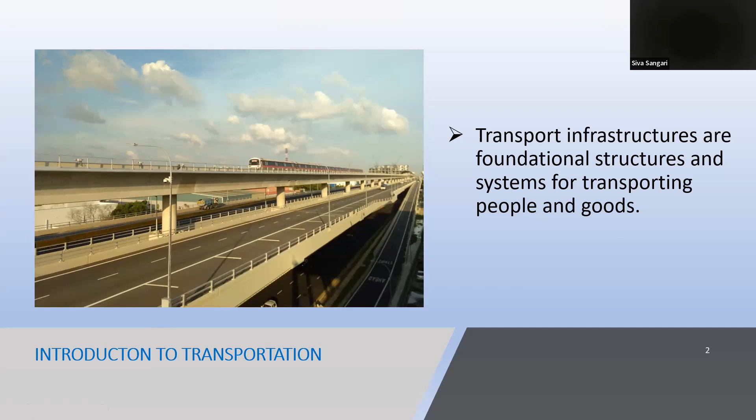Are we talking about infrastructure today? Is that so important? Yes, of course. Infrastructure matters most, especially at this time where cities are growing bigger and bigger.

By 2050, almost 70% of the world's population will live in cities. Such large-scale urbanization brings significant challenges, so established cities need to upgrade their existing infrastructure. An example is Chennai, a city that's existed for a few decades already but still needs to upgrade its aging infrastructure.

So it can keep moving today while anticipating the needs of tomorrow. For newer cities, they have to plan well and move fast, not only catching up with existing demand but also planning for future needs. Usually we cater for 100 years of needs, not just this year or a 10-year plan. It should be a future plan. Infrastructure is a matter in this world at this time.

No matter where we are located, even a large city or a rural town, infrastructure is fundamental to our day-to-day life. I think everyone will agree with that. Of course, yes.

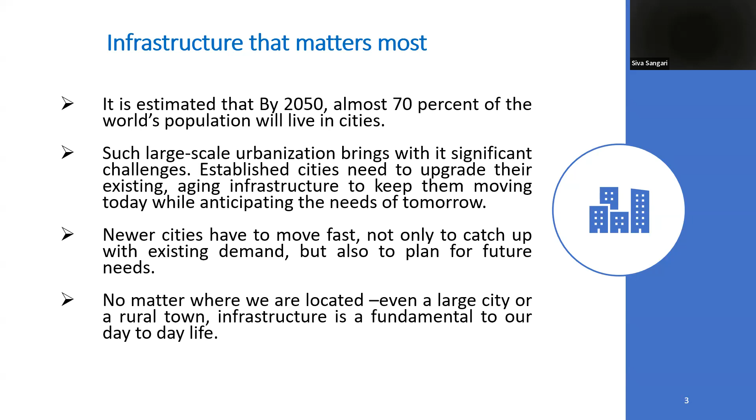So let's move into the different types of transportation. Just an introduction - don't mind, just stay with me. There's roads, railways, airports, and waterways.

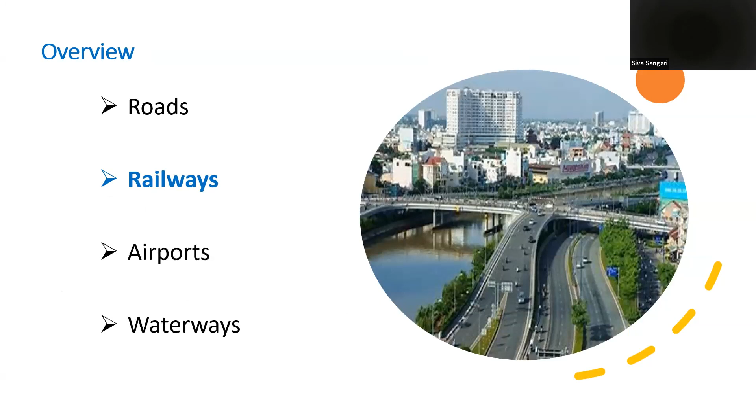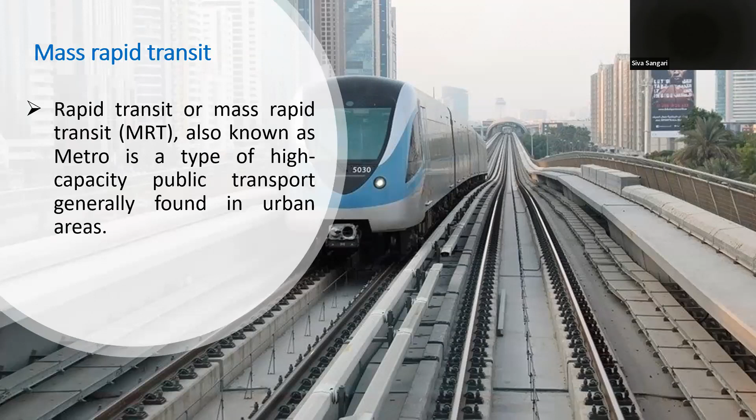Today we are going to go more in depth about the railways, specifically mass rapid transit. What is mass rapid transit? It's also known as metro. I think in Chennai or India it's very popular to call it metro, and it's a very high capacity public transport generally found in urban areas.

I'd like to introduce a bit more on the MRT network in Singapore. In Singapore, the MRT is quite old and very popular - they started constructing it long ago, so it's been prominent in Southeast Asia. I'd like to give an overview of the Singapore MRT.

You could see the colors on the right hand side representing different lines. We have actually so far 122 stations in operation and 203 kilometers as of now, but it's growing every year. We have plans, and every year we are opening new stations.

A few months ago my recent project finished, and we opened a big interchange station right in the urban area. That's become very popular now within just a few months. It's growing and growing every year, or I could say every month. They have plans for expansion.

The MRT has been continuously expanding ever since. The network is expected to double by 2040 as a result of ongoing expansion works. The Singapore MRT is the oldest, busiest, and most comprehensive rapid transit system in Southeast Asia, in terms of length and number of stations.

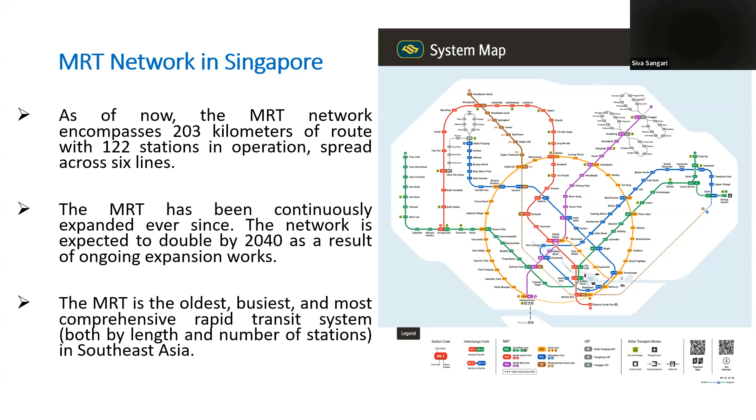Next is the metro network in Chennai. I think you're all aware of this, but just an introduction - I have also worked in Chennai Metro at the beginning, when they needed experts. I worked there about 1.5 years at the Anna Nagar, Shenoy Nagar stations.

What I could emphasize about the Chennai Metro is that it's the third largest metro system in India after Delhi Metro and Hyderabad Metro. The system commenced service in 2015 after the opening of the first phase of the project. The network consists of 2 color-based lines covering a length of 45.1 kilometers - maybe this is like phase 1.

They have already started with phase 2, and in the recent budget you could see plans for more metros in cities like Coimbatore, Trichy, and Madurai as well. Hopefully the metro will cover the major cities of Tamil Nadu. This is good for everyone, including NRIs - we could join the team of experts and serve our nation. I'm eagerly waiting for that too, in Trichy, Coimbatore, or Madurai, so I could join.

This is really fantastic news for civil engineers and students especially. By the time you complete your degree, say 3 or 4 years from now, the works may be starting. So there are more opportunities for civil engineers, and you could start your career with the right projects and the right works. That's really happy news.

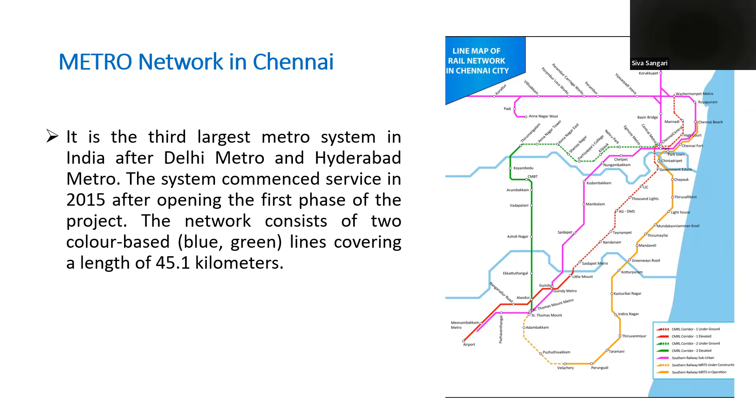Okay, let's go in. I think we have covered the overall networks in Singapore as well as Chennai. So let me go into today's main topic, the MRT design and construction.

What's really magic into the MRT design and construction? Yeah, it's nothing magic. There are many aspects. I would like to cover more on the 3 main items which are more related to civil engineering students.

So first of all, alignment. I think Dr. Vandana ma'am already covered a bit, but anyways, I have some slides and photos which will be attractive, taken from my projects. So maybe very useful.

Next one is environmental aspects. We should not ignore the environmental aspects in any construction, not only the MRT. Environmental aspects are more important for any growing construction here. And then the last but not the least, the engineering, which is our core subject. So these 3 are the main items I will be covering today.

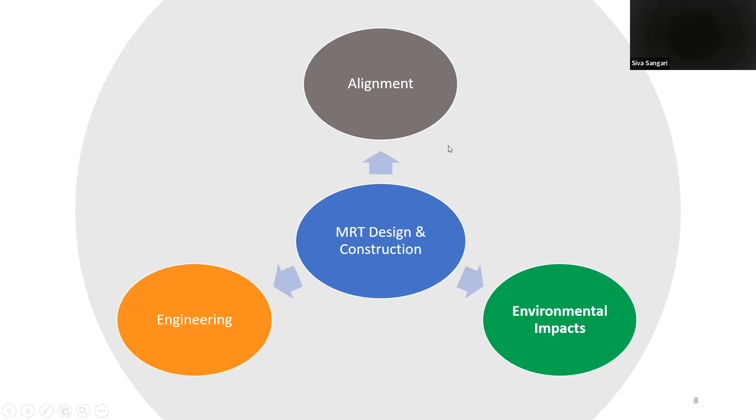So let's start with the alignment. Why is alignment so important? It's because railway line constructions are capital intensive projects. Once constructed, it is very difficult to change the alignment of a railway line because they are costly, really costly.

It's not only the government funding, right? It's getting funds from other governments or other companies. So it's not so easy to change your alignment. You want to go from Anna Nagar to the airport now, and later you want to change that route by increasing 5 kilometers - no way, it's not possible at all, because it's a major and quite capital intensive project, and it needs to be financially well structured at the planning stage itself.

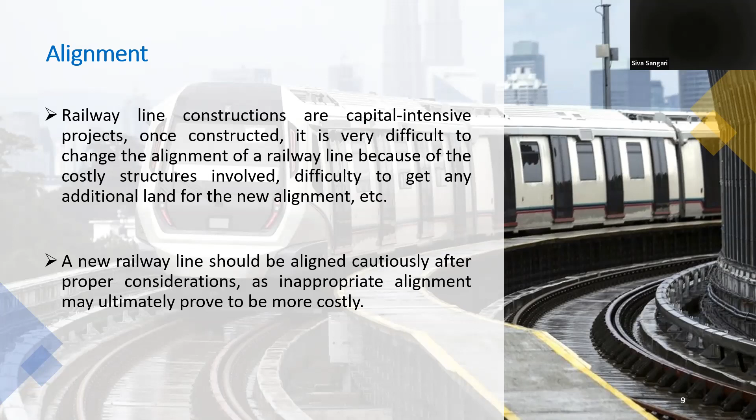So it's all collated with the alignment. A new railway line should be aligned cautiously after proper considerations, and any inappropriate alignment may ultimately prove to be more costly. You can't change it - even say 10 mm of height change in the alignment will cost millions of dollars. That's because we need to decide the alignment very cautiously in terms of horizontal, vertical, everything.

So what are the basic requirements of the alignment? The purpose of the new railway line is most important. It can be for industrial needs or public needs - it can be anything. So the alignment of a new railway line should serve the basic purpose for which it is being constructed.

Next one is combined development. The new railway line should fit with the general planning and form a part of integrated development of the city or the country. We can't say that you have to travel from your home for 1 hour to reach the MRT station - no way people will take that. So it should be a combined development within reachable area of the public or industrial users, whoever they are.

And then we should choose the shortest route. We have many routes, but we should choose the shortest because the aim of an alignment is to reach from one place to another place. So we should choose the shortest. I have a few more.

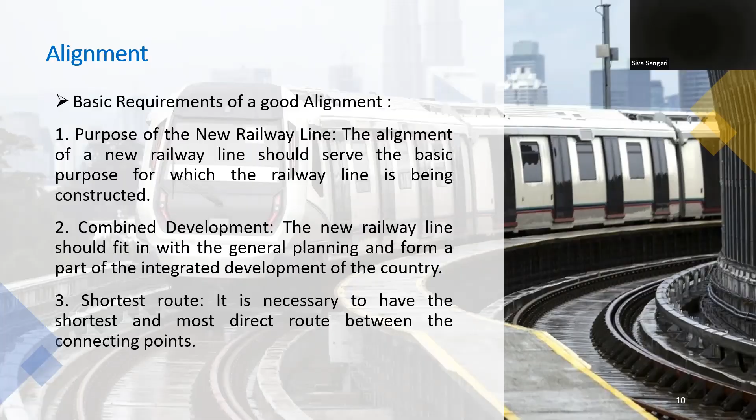So that's the topics covered already in the alignment. I think you have more or less got an idea of how we choose the alignment. There are alignment specialists, and we civil engineers are always a part of alignment specialists, and we usually give our feedback, our ideas, everything. So let's move on to the environmental impacts.

The environmental impacts refer to the possible effects of the proposed construction on the natural environment. These effects can be negative or positive. Sometimes it can be positive as well - you are creating a new feature, new shops, or a new development. The city or place can become a well-developed financial or industrial place - that's a positive.

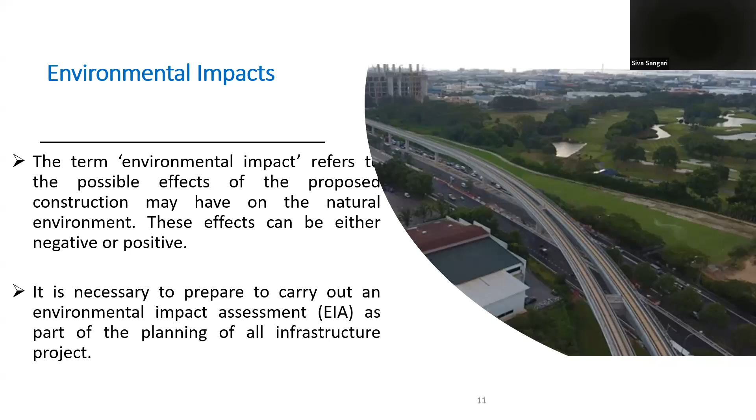And the negative can be like, in case you have no choice, you are using farming lands and all - of course it's negative, but we should have a balance. So the environmental aspects and impacts need to be covered very well during the planning of any MRT line. It's necessary to carry out an environmental impact assessment, which we usually call EIA, as part of the planning of all infrastructure projects.

So what is the purpose of the EIA? It's to ensure that the environmental effects of a proposed development are properly considered. This EIA could provide the local planning authority with better information about certain types of project, enabling them to make a more informed decision, so that the authorities could have an idea whether the permission should be granted or not.

These environmental aspects should consider not only the recent or near future issues, but cover overall future impact, say over 100 years, onto the area where the MRT is planned. This gives the government and authorities an idea whether to go or no-go for the project. Also, this is usually published to public forums so people understand what will be constructed in their area and can plan ahead. So environmental impacts are, of course, very important.

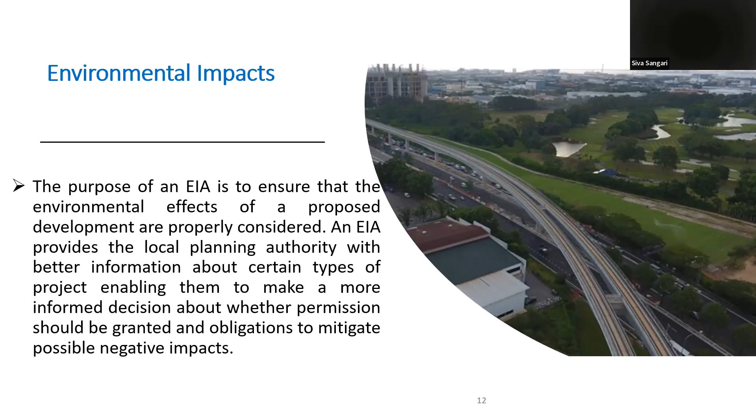Let's have an overall idea of architecture. While deciding other factors, aesthetic aspects should also be given due weightage, because it's very important. The design of a public transport system is becoming a symbol of the city. Maybe 30 years before, we could say LIC is a Chennai city symbol. Now there are a lot of taller buildings than LIC, but we could still symbolize it as LIC.

So accordingly, it's very important for the overall feature to be a symbol of the city. The design of stations is also important for local people. We could get specialists from the US who could give a fantastic design for Chennai or even in Singapore, but that may not really be attractive to local people, or they may not even recognize it—for example, showing cartoon characters or sculptures the local people don't know, that's no use at all. So it's very important that station design attracts local people, defines the places, and acts as a gateway to communities. That's where architecture plays its role, and that's why architecture is very important.

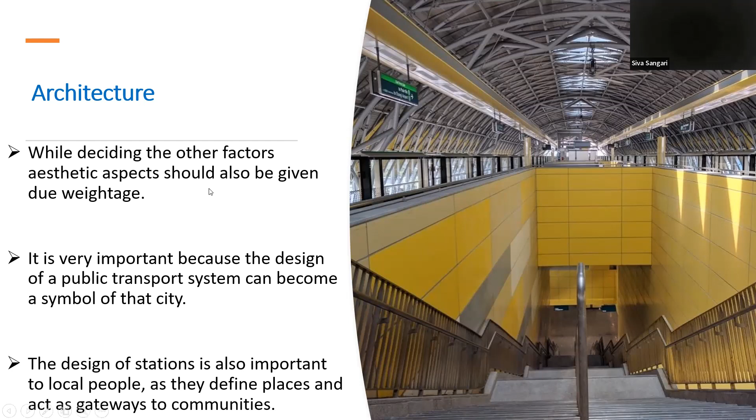Okay, let's move on to civil and structural engineering. There are many aspects to cover.

I believe there are no issues, I'll continue. Thank you, yes ma'am, there are no issues ma'am. Thank you, thank you—if anything, you can interrupt me, you can stop me, okay, or ask a question, you can stop me anytime. I have no issues, yeah.

Thank you. So there are many aspects in the civil and structural engineering field, but I'd like to combine a few main things. First of all, structural integrity and stability. Structural integrity plays a fundamental part in ensuring the structures are fit for purpose. This is the first line in any specific codes or specifications—the structures are fit to purpose. For the MRT, this means it should be fit for the MRT station.

It should also secure a safe design during construction, not only after construction. Design should cover safety aspects during construction and assessment of the structure. Assessment is most important—you think once everything is constructed safely, that's final, finished, bye-bye, station opens. But after, say, 10 years, there's a small leak on one side—how could you assess that? That's very difficult. So at the planning stage itself, we should consider the assessment, maintenance, and inspections of the structures. That's very important, which is why I put it as the first bullet point: structural integrity and stability.

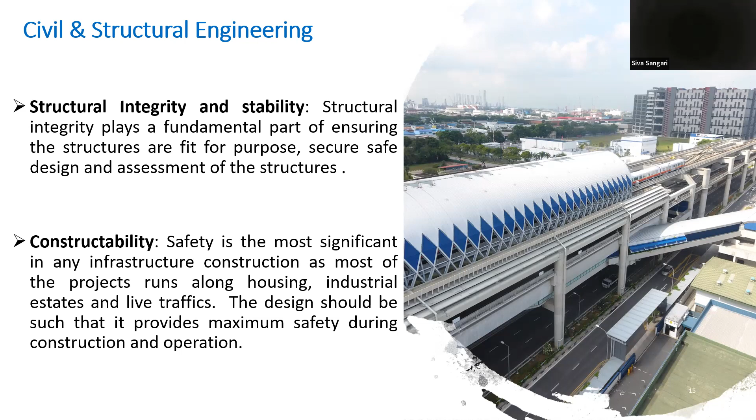So the design should be such that it provides maximum safety during construction and operations. Everywhere we should consider safety in any design - beam, column, everything. Safety is the first thing. You can't design a massive structure and just propose a 2-meter beam without considering how you are carrying it, how you will be installing that on site. That's the first thing before designing the beam or column or anything. I use beam as an example, but it's applicable for all members of the infrastructure or any project.

Third one, durability. Why is durability important? It's not a household or small tenant area that you will be dismantling after 10 years - infrastructure projects really last 100 or 120 years. We follow the Euro codes, and we also follow the LTA codes - the Land Transport Authority is Singapore's main authority that controls all this. They have a specific period for all MRT projects to sustain for 120 years. So the design itself should cover the design life to achieve the design life requirements - that's most important.

And last but not least, the economy. Because I could design a fantastic station, I could design 50 kilometers - but who will finance me? So economy is the main thing that should cover everything, and it should be attractive. The economy should be considered in our design so that everyone could approve it - not only construction and design cost, but also maintenance cost. I could build a big station, but if every year I have to paint it, every year I have to repair it, that's no use at all - it's really a wastage. So the design itself should cover economy along with maintenance, construction, everything.

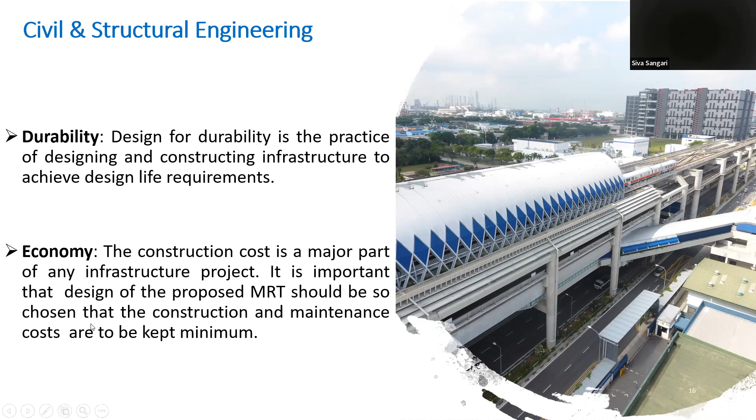I think I have covered all the bullet points. So hope you have got an idea of how we manage an infrastructure project, just in the planning stage.

Okay, maybe I would like to bring you all to the project now, so it will be interesting for you - our own project, so that I could give more insight and you have an interest. It will be interesting, I'm sure it will be interesting. I'm not sure if you all just had your lunch, I'm not sure whether it's sleepy or not, but I'm sure the photos coming up will be interesting and will keep you awake.

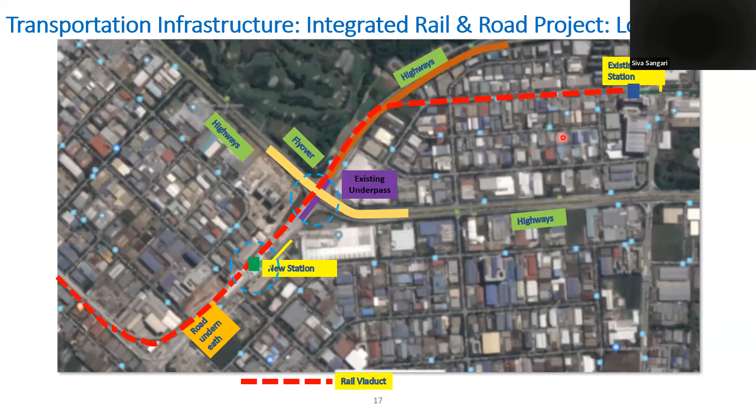So for this project, I would like to give an overview. It's the first integrated rail and road viaduct project in Southeast Asia. I think now there are many other projects under construction, but this is, I could proudly say, our first one - really a rail and road viaduct project in Southeast Asia, and the tallest as well. This project has 4 stations and an associated 4.8 kilometer road viaduct, 7.5 kilometers of rail viaducts. This is mainly to improve public transport connection to a neighborhood industrial area - as I said, it's connecting to a port. We even have interchange stations, which I'm covering in the next slides.

What are the key challenges? We have discussed the plannings, alignments, construction, safety, maintenance, etc. That's the planning stage. Are those bullet points still existing in the real project? Yes, there are many challenges we have faced.

The first thing is construction over live traffic. We could not close the road for a long period over the years. We could only close one lane for a few hours, and that also requires a lot of approvals. So mostly the constructions are ongoing over the live traffic.

This is also a long span rail viaduct. I'll cover in upcoming slides how long span rail viaducts are constructed, with spans over 70 meters. These rail viaducts also cross existing flyovers, and the height of the existing flyover is already 5 meter plus, which is the minimum for Singapore, so we should construct above the flyover. Then we have interchange stations, which are actually 33 meter height with 4 levels, over live traffic.

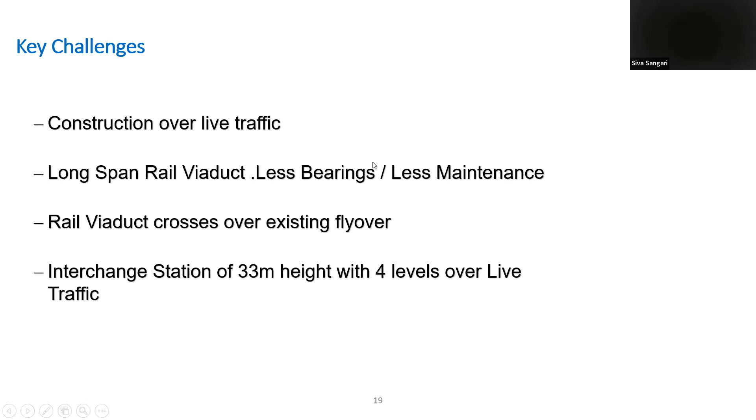What are the types of safety and implementation we have covered? There are 3 major safety implementations: the first is design safety.

So design safety - while designing, how can we ensure safety? That's maybe a question for the students as well as many of us. How can you ensure safety during design? We are just following the codes, right?

It's not only about following the codes, but testing and specifications, construction methods. Every code gives you the idea of designing, but the construction method should be discussed with the construction team before finalizing a member or scheme of an MRT. So construction methods should be considered in the design safety and risk assessment.

We always have a risk assessment, which is like a flow chart, and everyone should give feedback - for example, an engineer, alignment, architect, etc. All will have feedback on the risk assessment.

Then construction safety - this one we are more or less aware of because we can visibly see how constructions are complex in nature. So site appreciation, work methodologies, and product quality assurance - we should maintain product quality assurance throughout construction.

Finally, but not least, public safety. I've heard a lot of news about lack of public safety even taking lives, which is more valuable, right? So public safety is more important. We could have a temporary safety system or a permanent safety system, and public risk management and communication, which is most important.

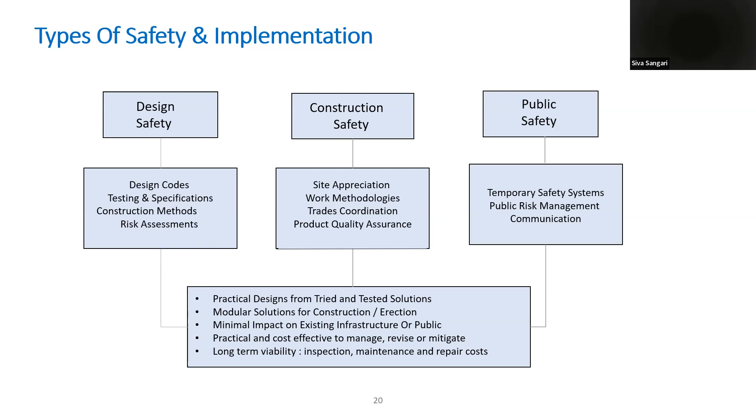So finally, what we are coming up with are practical designs, modular solutions, and minimal impact on existing infrastructure or the public. I can do a very powerful alignment, but if I'm going to demolish a kilometer of houses, that's really not possible. So it should be minimal impact to existing infrastructure. All these aspects we have covered in our project.

So let me show you the station - this is like a footprint of the station, shown in green color. The main station roof is 200 over meters, about 300 meters in total. This station particularly has 2 entrances, but a few of the stations have even 4 entrances.

So the entrances are connected, away from the road. This is the road flow, and there are link bridges connecting from the entrances to the main stations, similarly on the other entrance as well.

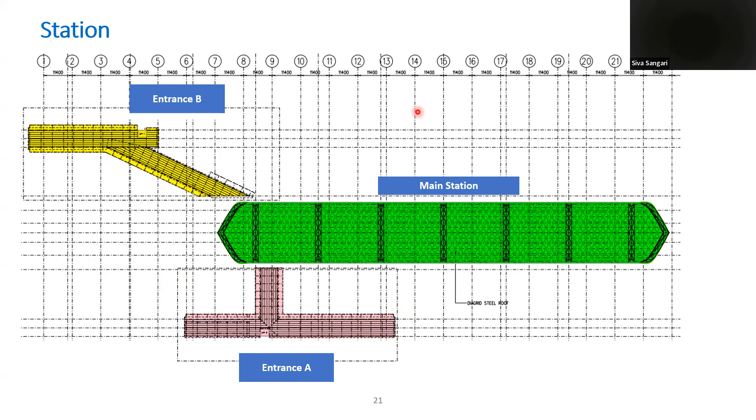Give me a minute. Yeah, okay.

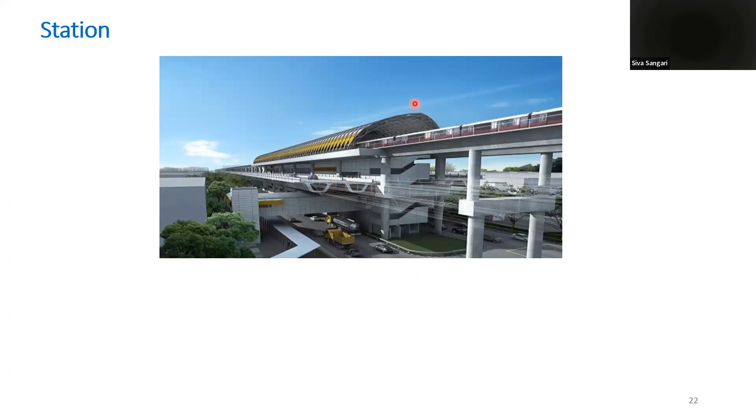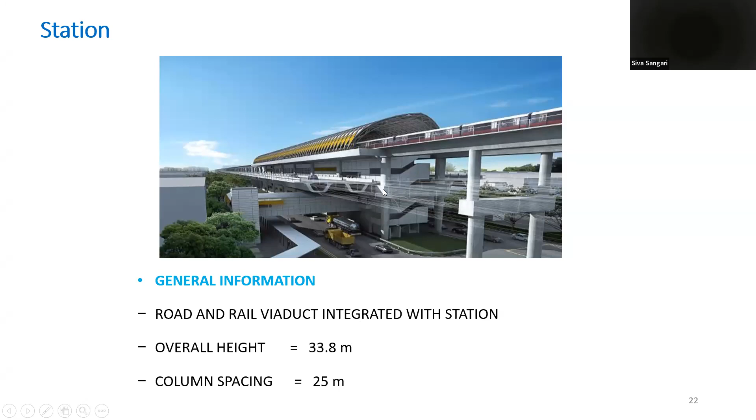So general information of the station: it's a rail and road viaduct, which you could obviously see from this photo. Overall height is about 34 meters, and columns are spaced at 25 meters near the station, but over the station, the columns are spaced at 40 meters and even more.

This is the architectural footprint of the station. The top is showing the plan, and the bottom is showing an elevation of how tall the escalators and staircases are, 30 over meters here.

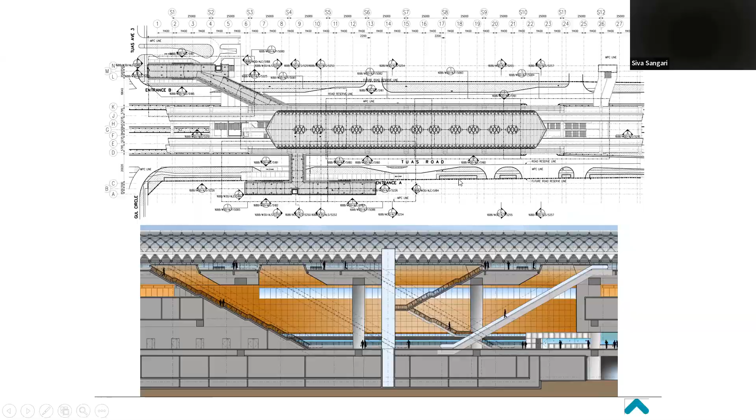This is the station construction sequence. Let me run through quickly. It's a slideshow kind of thing, graphical representation, so you will have a better understanding. Let me have a quick follow up.

Bored piles constructed, pile caps, column stumps, columns up to concourse. This is the concourse level.

You could see the beams at the concourse level, and this is the mezzanine level beams. This is the main beams which are going to actually support the railway loads and everything.

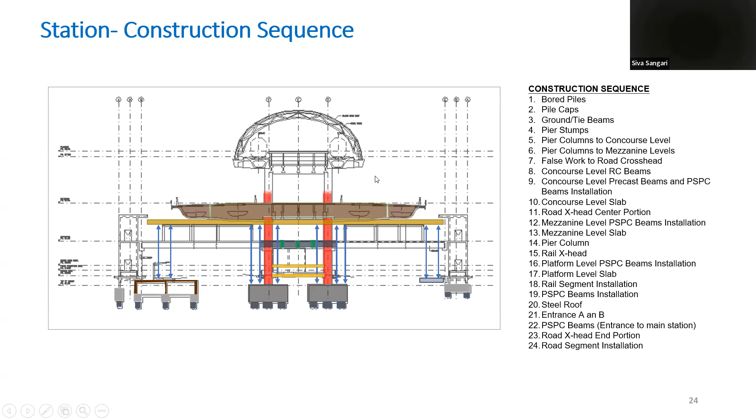All these graphical shows are really similar to what's on site, because most of the, for example, the beams are pre-constructed and installed on site.

I have some interesting videos on the steel roof, how they are erected.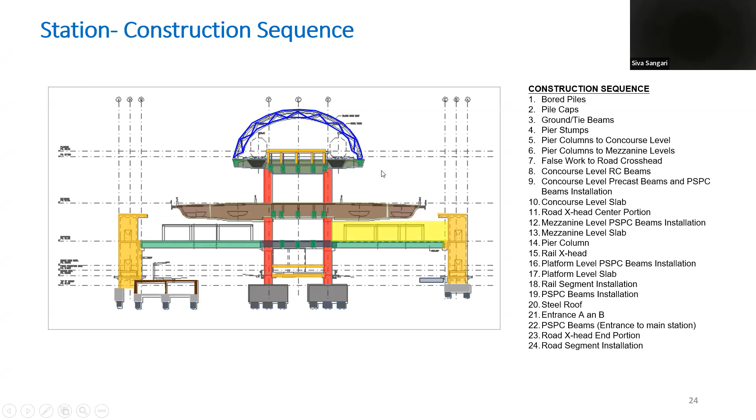So how do we choose the roof? Maybe this is just an idea. It's not like, okay, today we are constructing MRT, let the team leader choose the roof of the station. Not really at all. We have procedures. We should have a few plans or options to be chosen by the team, considering items like constructability, safety, maintenance, and so on.

So accordingly, we have 4 options for the roof. One is the diagrid roof, which is on the left hand side, and the portal roof on the right hand side. You could see even the sketches from my fellow architect colleague. The bottom is the tensile fabric roof, and the bottommost is the barrel form roof.

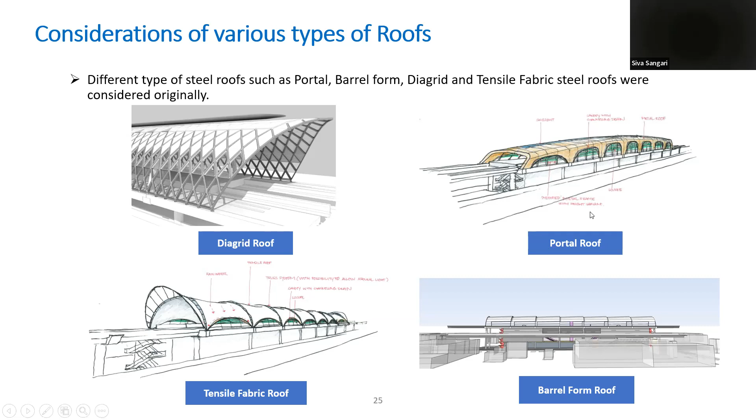Among all these, we have chosen the diagrid roof. You can see the photo, this is after the construction, while the station is running. So this is the diagrid roof.

Why we have chosen this? These are simple, cost-effective, allow ventilation, and fully prefabricated. As I mentioned, I have photos behind. Those are fully fabricated as modules and just erected on site. This way we have minimized a lot of accidents and ensured safety during construction.

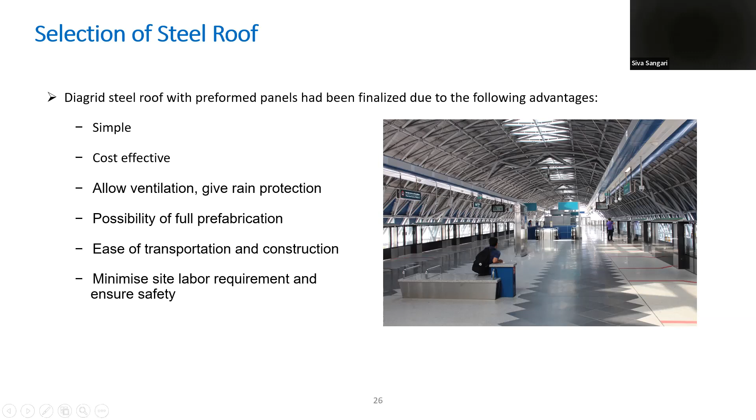And then there's the ease of transportation. We can't do a module of 150 meters, there's no way to transport it, so we should module it accordingly. And then minimize the site labor, so by minimizing site labor we are ensuring safety.

So what are the main features? There are glass panels at the middle, which allow natural daylight. On the right hand side, there are edge panels, which allow natural ventilation.

And then at the bottom, you can see the roof gutters. They are preventing the rainwater from the roof catchment affecting traffic flow. So they are the roof gutters, they are quite really fantastic.

It's like our architects say that it's kind of a ship arrangement. It's not very clear in the photo, but when we see it from the road, it's a really nice view.

And then precast rain screen fins, these are prefabricated and fixed on site.

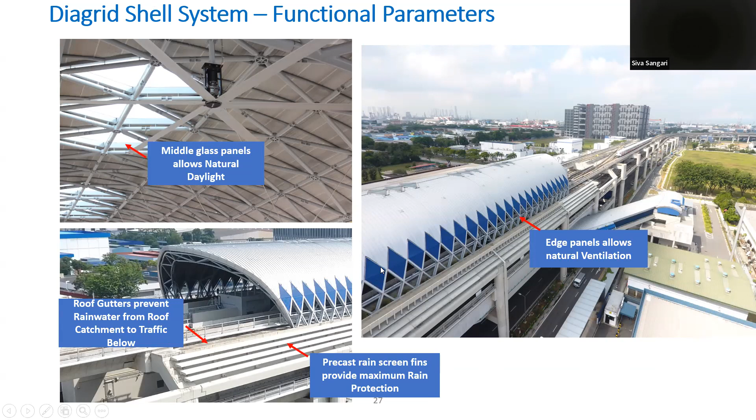So this is the main truss erection. This is the main truss, 3 parts. It will be brought in 3 parts: part 1, part 2, and the center part.

You can see all those cranes and the workers, and you could see there are not many workers, it's really minimized. And it's very fast as well, the timing too, once fabricated, it's very fast.

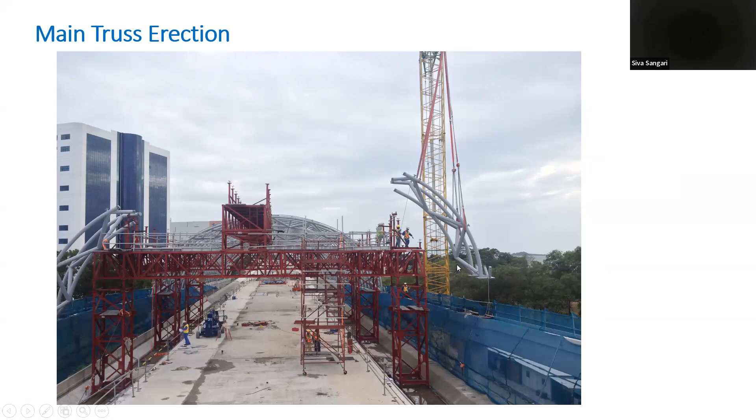So these are more photos showing the truss, and on the right hand side, the big modules are erected between the truss. You can see these are the modules.

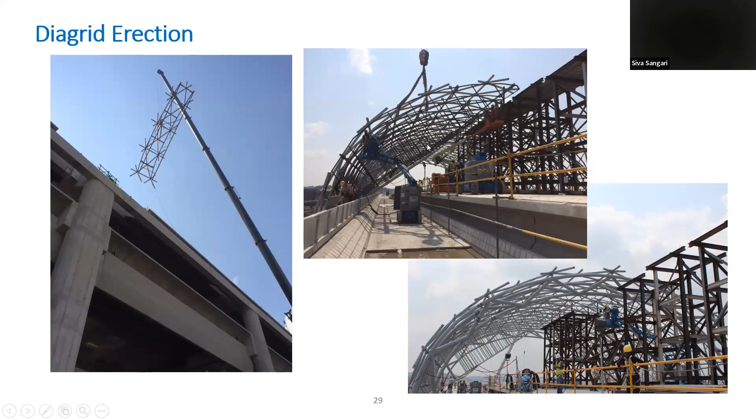Okay, some interesting photos on the live construction. So you see on the left hand side, this one is half of the station.

Why we are doing half of the station? Because the road could only be closed on one side. We can't close the whole road for years or for months. So the only possibility was to construct half of the station, complete everything, and then open this side.

Let's move on to the left hand side. So it's like a partial construction. Most of the columns and beams are prefabricated at the casting yard and brought and erected on site. That's why the number of workers is really minimized, and thus less accidents.

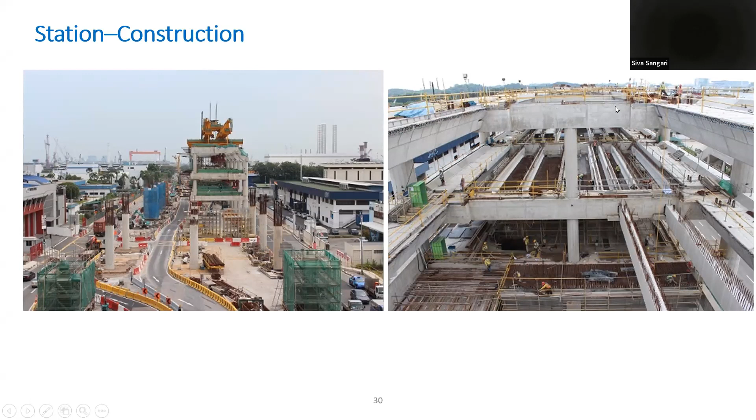So the right hand side is showing an inset of the levels. This one is the concourse, mezzanine, and this is the girder. You see the girders are here, which are the railway girders.

This is similar but different stations. The roof video, I prefer to show at the end of the presentation, it will be better.

Yeah, so let's move on to my next. Oh, it's on, is it? Let me.

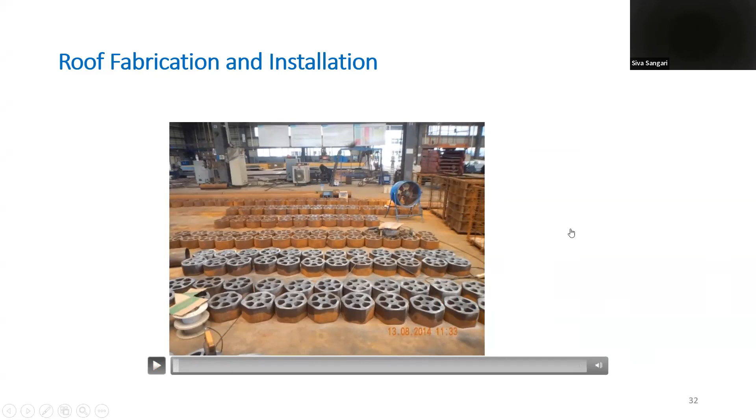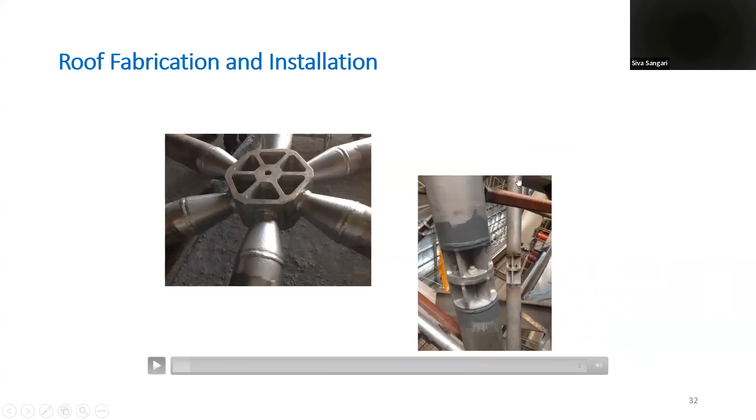Let me move on to the next slide, then I will come to the roof fabrication video, which will be quite interesting.

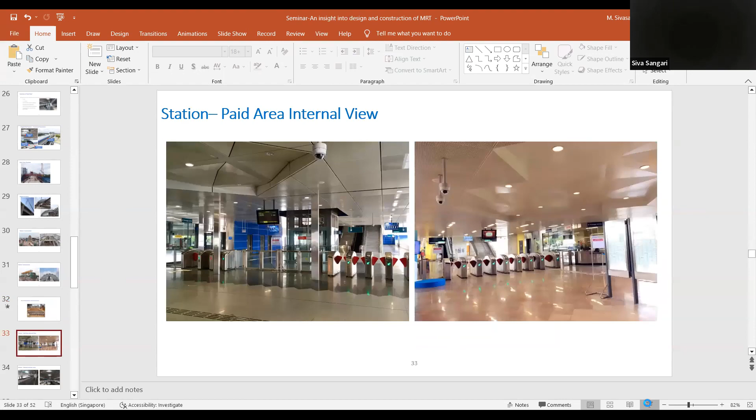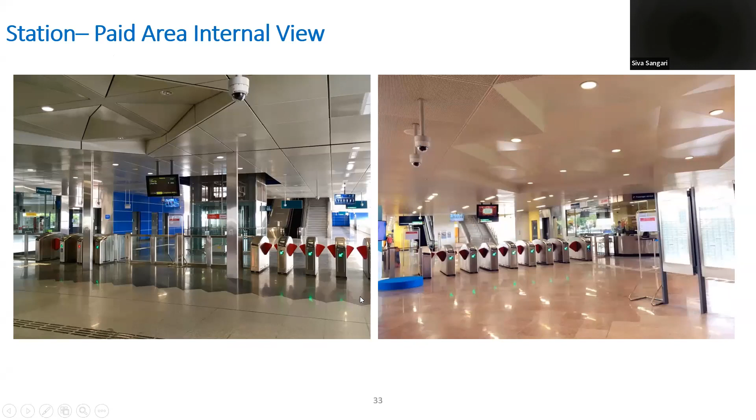These are some internal views of the station, paid areas, ticketing areas. You can see the different colors for different stations - yellow, blue. And this is the platform view.

I want to show more inside pictures, which will be more interesting for the students, especially since these are the projects we have done. At every level, we could see what engineering aspects we have considered. That's the reason I have more photos here.

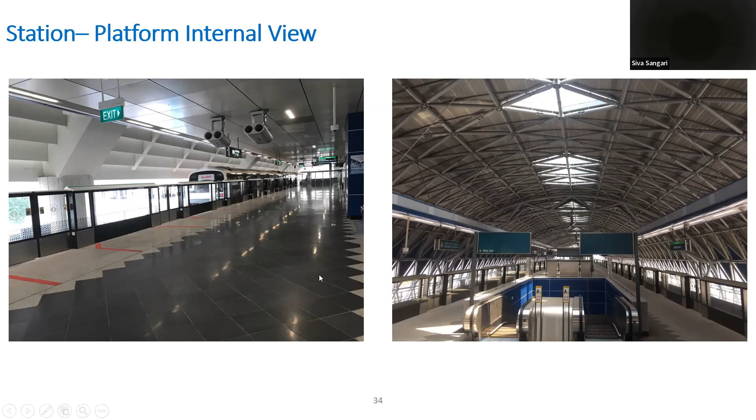This one on the left-hand side showing the platform. You can see these are the test trains. I took these photos during the testing, that's why you could not see any commuters.

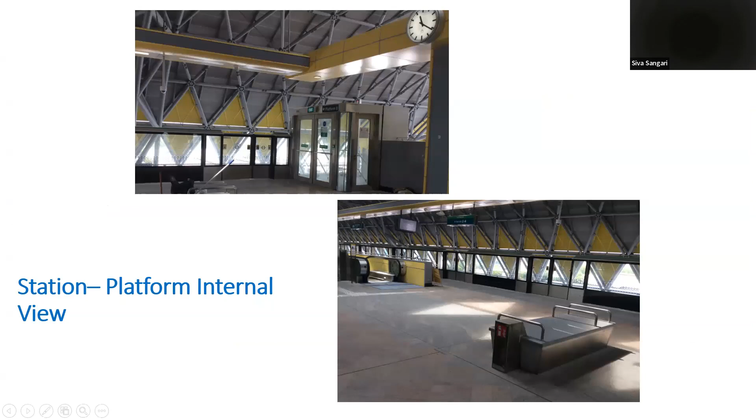And this is another station, which I think is similar to any metros. I have covered the stations very well.

If you have time, let me proceed. I will have a quick one.

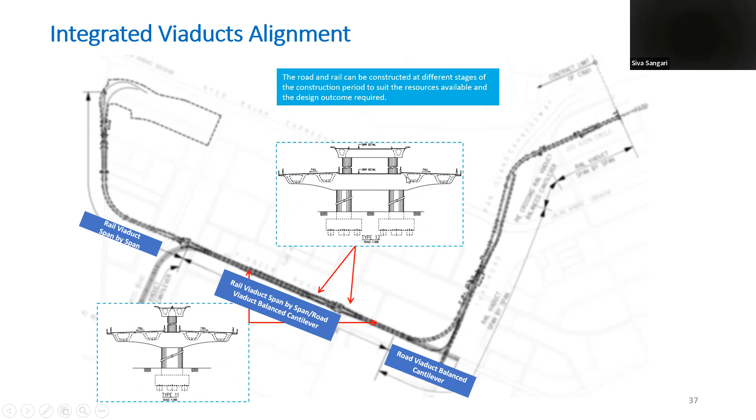So you can see this is the overall view of the project, where you can see the rail viaducts, road viaducts, plus the integrated viaduct that I have mentioned here. So this is the rail viaduct. This one is integrated with the road and rail viaduct.

These are span by span construction. There are many ways of constructing the viaduct, and this is one of them, span by span. The segments are lifted from at-grade roadway by the gantry system. Each segment is approximately 55 tons, and the cycle time for finishing one span is about 4 to 5 days.

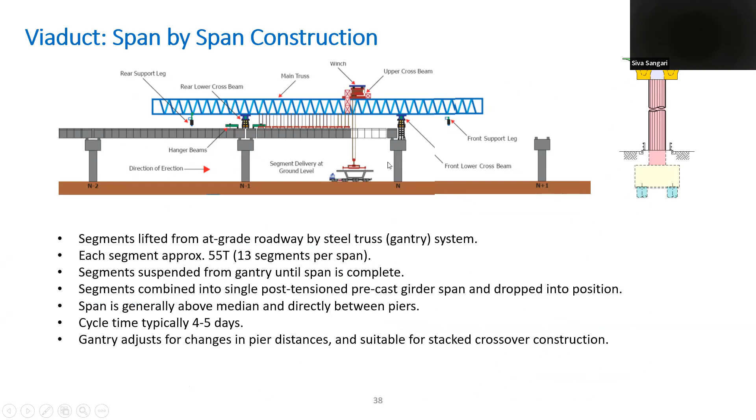So, span by span construction - these are some photos. You can see on the right hand side.

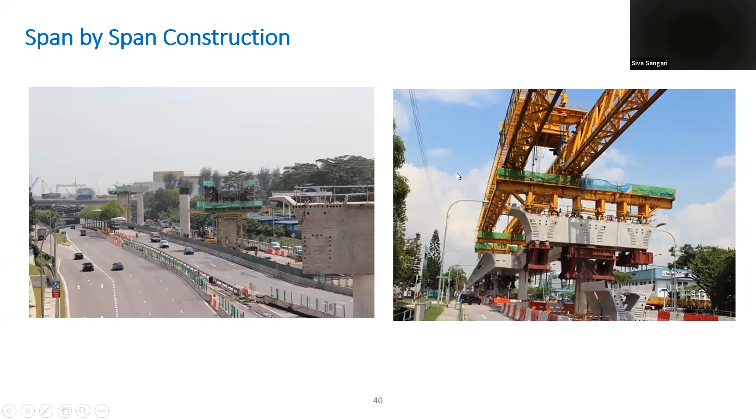Give me 1 minute, give me a second. I stop here. Give me a minute, yeah, just give me a minute.

I'm sorry, there is a disturbance from my kids. Sorry, okay, I continue.

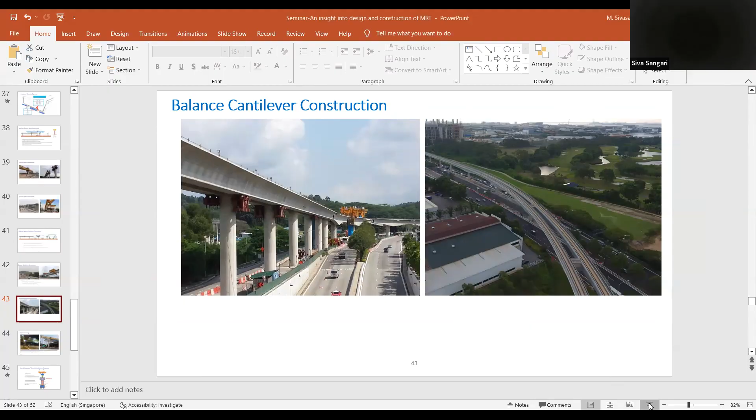So this is the balanced cantilever photos. Let me go into the PowerPoint slides. You can see the balanced cantilever, mostly these photos are showing mostly constructed structures. And this one, you can see the overall viaduct.

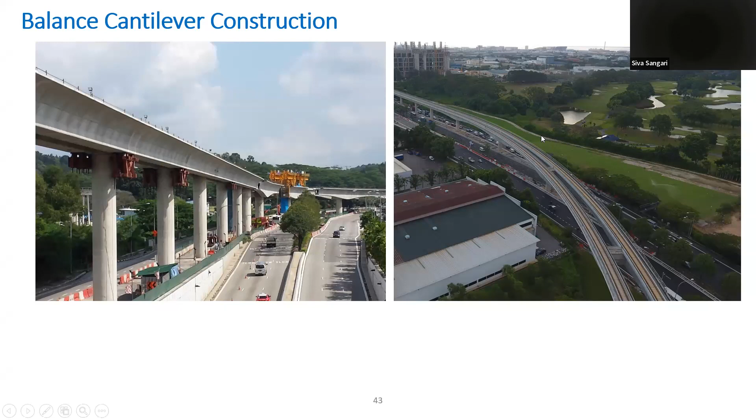That's an interesting location where there is a flyover crossing - our rail viaduct is crossing the flyover. That's very interesting, so you can see most of the operations at this location are done at the site during nighttime. The lights are really... I remember that time was really a nightmare. We could even spend, I think, 2 nights over there, with most of the engineers and team leaders on site, because during construction the traffic is still live.

So on the right hand side you can see before the erection, during the daytime, but the left hand side is during the erection at night time. The beams were launched at 21 meters above the ground. The construction is carried out over live traffic with no impact on the existing flyover - we don't stop any of these roads, only here, the right side is still moving.

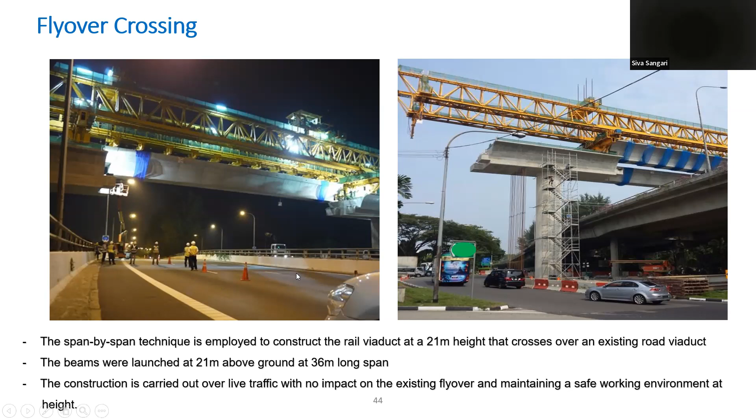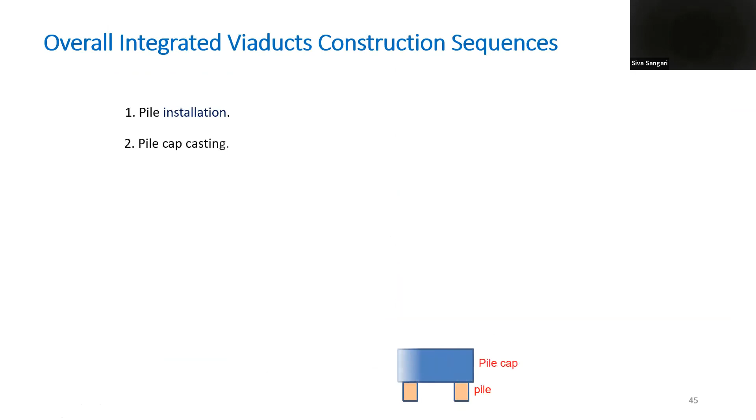Overall integrated viaduct construction sequence is just a graphical representation - it's a very quick one. So pile cap, the columns, piers, and then crossheads, and you can see the gantry girders.

Yeah, these are all like... see the viaduct, the beams, mostly these are all prefabricated. These beams, especially you can see the crosshead beams or post-tensioned beams, PT beams.

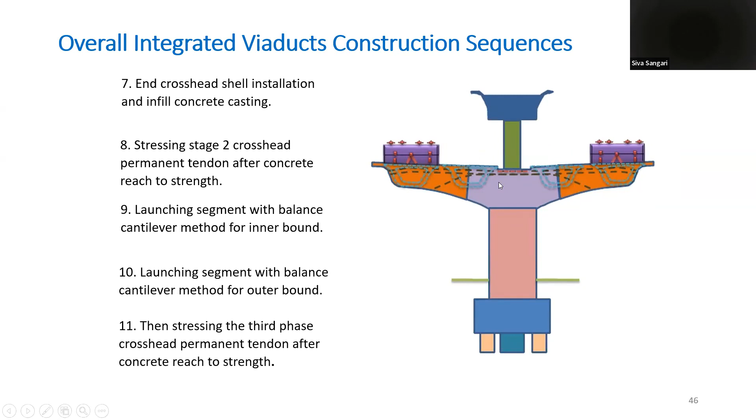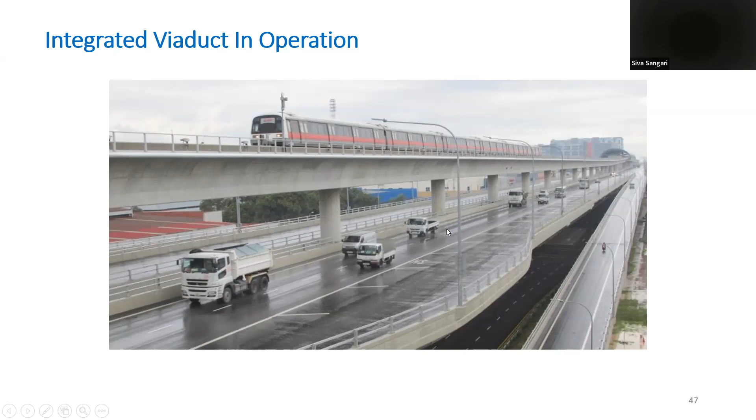So this is the station and viaduct together, the photos. I think I have covered mostly the inside of the MRT structures. It's not only MRT structures that civil engineers could do, so I want to cover opportunities for civil engineering graduates - that's more important since there are many students here. Let me have a quick view.

So design of buildings, type of transportation structures, dams and foundations, and many other structures. Then you could use software for design and creating blueprints, on-site work, including site supervision, liaising with construction workers, architects, everything. And then another big, vast thing is the estimation.

And another one, which I covered before, is the environmental risk, assessing the environmental risk. Then maintaining a building or structure - maintenance. There are big opportunities for maintenance of buildings that many of us are not really exploring, but there are opportunities. And finally, but not the least, teaching and R&D. So these are the nature of the works any civil engineer could practice.

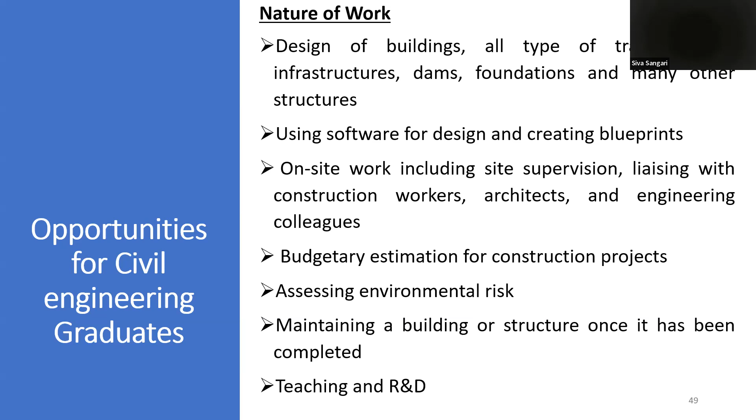It's not only, oh okay, I finished my civil engineering, only construction, nothing. It's not like that. There are more and more opportunities we could explore every day.

So type of employers where we can go. Can we just go to a construction company? Of course, not only the construction companies. Civil engineering consultancies, like what I'm doing now - ours is an infrastructure consultancy, mainly doing infrastructure projects. And then construction and building companies in general, anything, could be a house, could be anything.

Then property developers and environmental agencies and government departments - of course, that's maybe a major one for India. And universities, research and development centers. So by looking at these, I'm just pointing out a few, maybe I missed many. So civil engineers have a lot of opportunities compared to other engineering graduates, it's not only construction.

Let me show you what Singapore needs for certification for accepting any of the engineers from India. For example, we have a PE board, we call it Professional Engineers Board. So any engineer practicing here as a civil engineer could be registered here. Registration has a lot of stages, but the main one, the beginning one, is the degree should be accredited by the National Board of Accreditation, which is NBA. I notice KCG College of Technology got that, but I'm not sure civil engineering got it, but I'm sure that with Madam Vandana's leadership, maybe in future we will get it.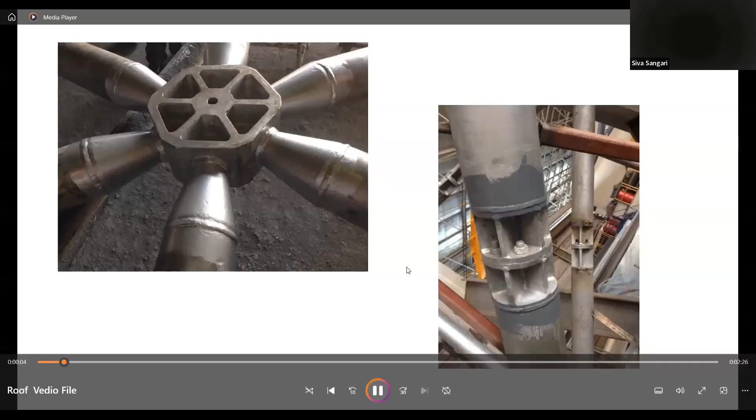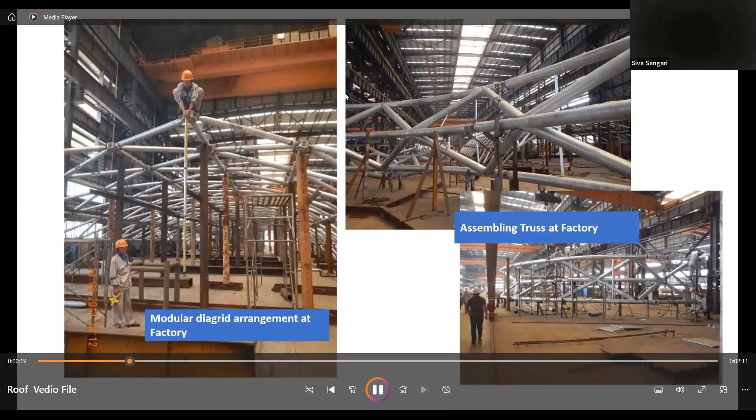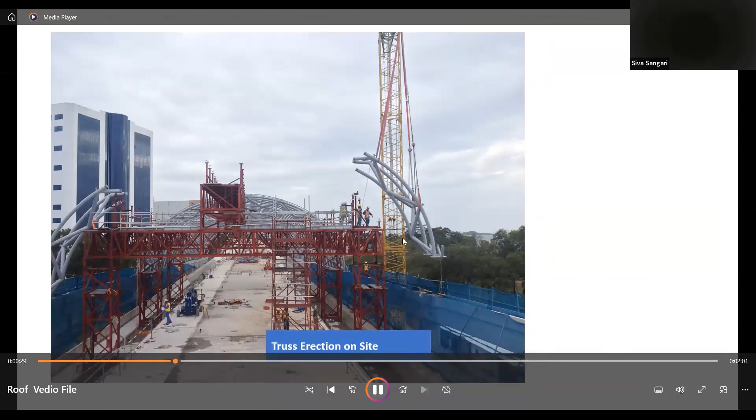So these are the assembly at site. I think we have a few sites, one of which is in China, then later brought to Singapore by sea. You can see how the trusses are erected from the ground by cranes, then installed at the points using only bolts. So you can see there are no welded joints, only bolts on site.

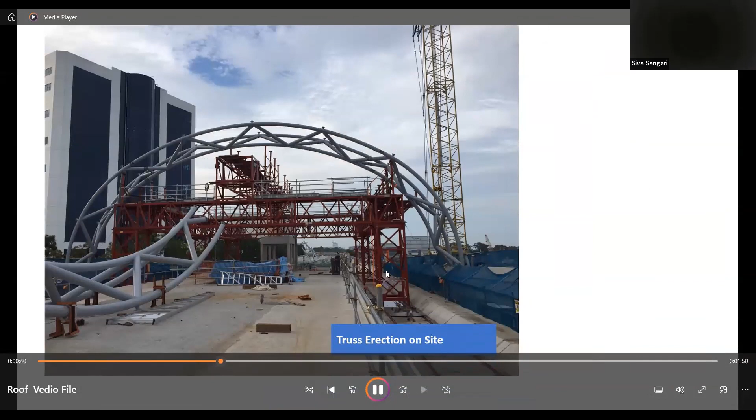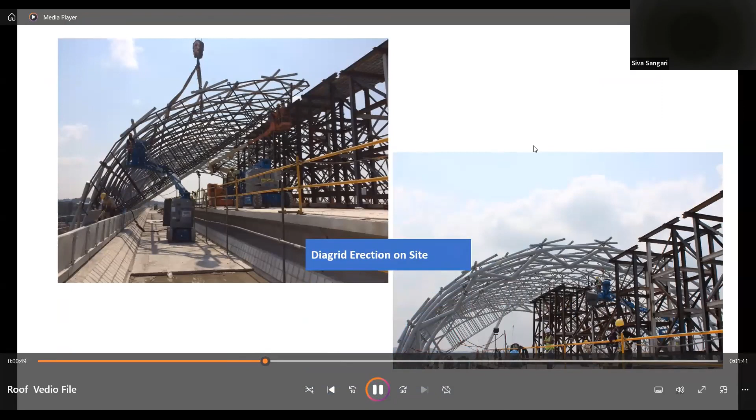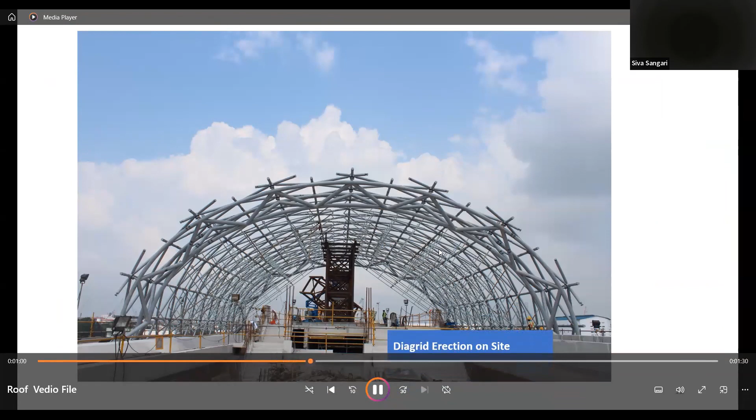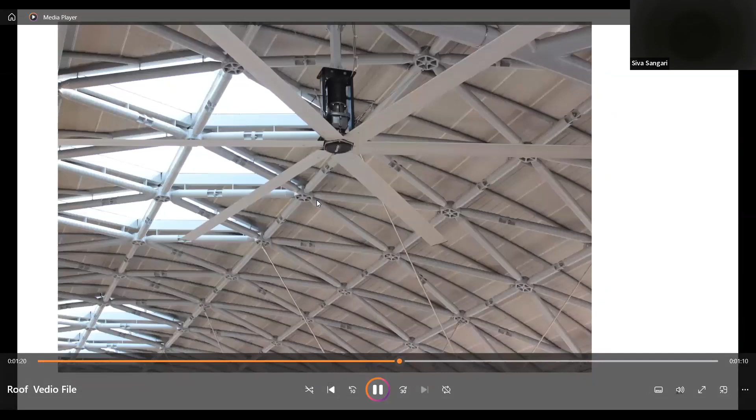So this is the diagrid erection, in between the main trusses. You see half of the final product, diagrid erection plus the truss. This is the main truss, and behind it is the diagrid. This is completion of the main truss plus the diagrid. The overall roof is ready for the finishes. These main structural members are completed within, I think, at least about a few weeks. You just bring in the modules and then it's final - this is the product. So this is the completed steel roof where you can see the ventilation openings.

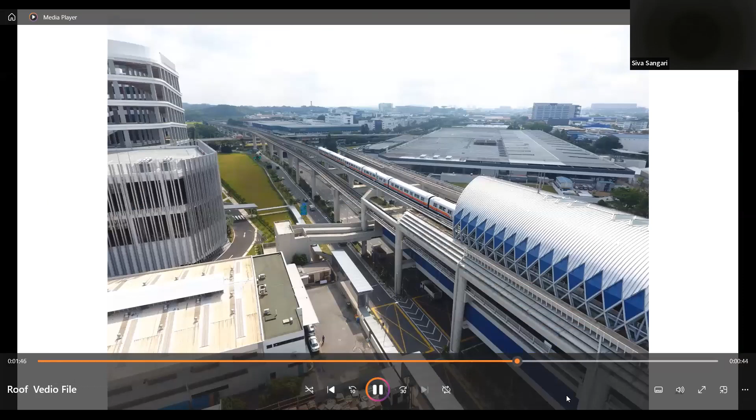You see the lights on top, natural light coming through on top. This is the outside view of the roof - the external view. And you could see, along with the length, the bridges.

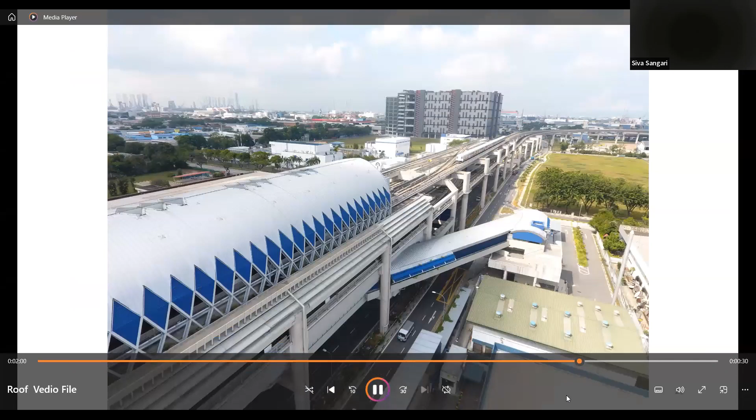I think the music is off. Anyway, my voice is music already.

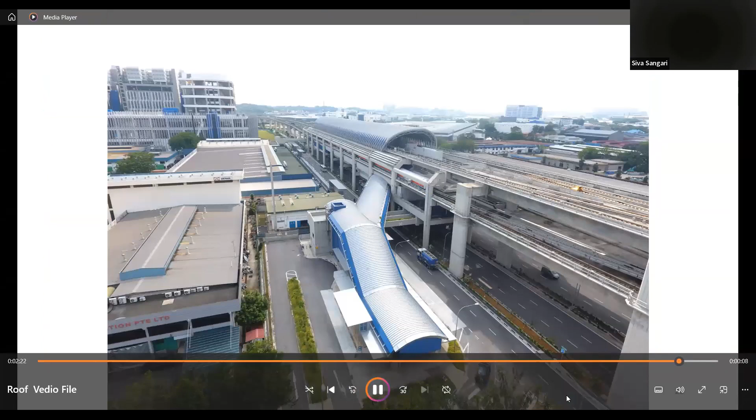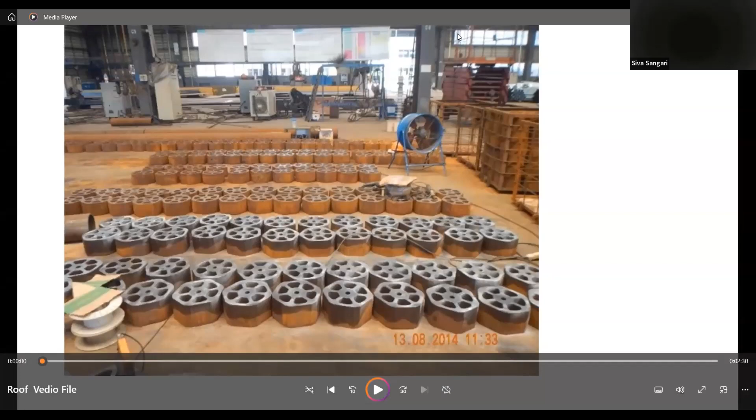So this is the overall view, and a top view. Yeah, I think that's it. Thanks, let me stop sharing.